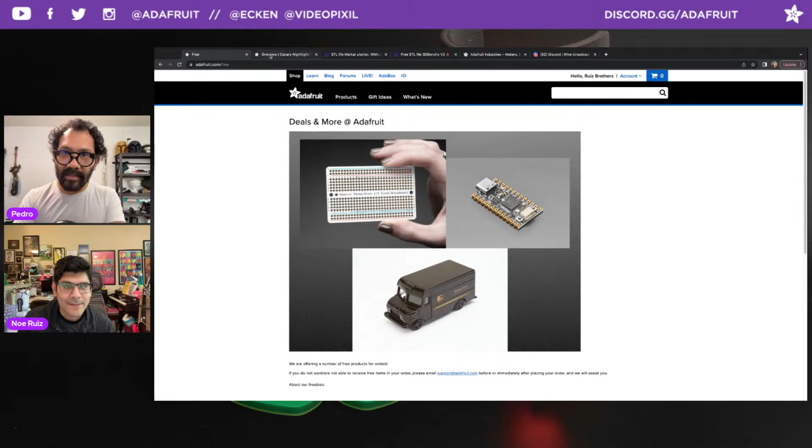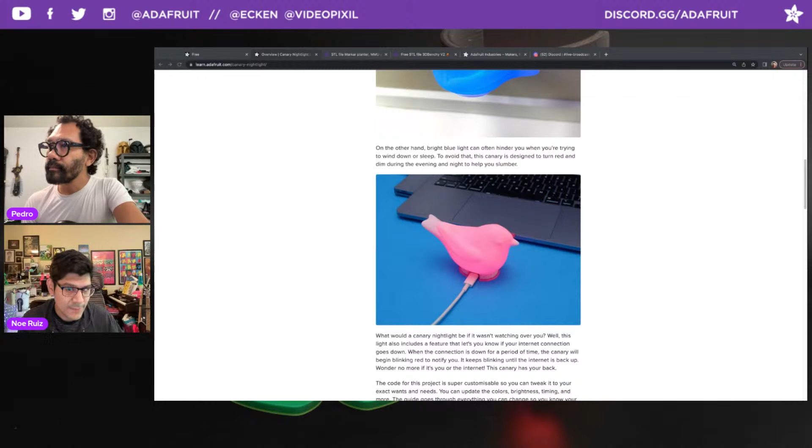Real quick, let me just run through the Learn Guide. This is a collaboration project with Kattni Rembor. She had this idea to make an IoT nightlight, and she was inspired by this song by the band They Might Be Giants. So she wanted to make a blue canary that watches over you, because that's part of the lyric. It uses Adafruit IO to get the time, and then depending on whether it's daytime or nighttime, it'll change the color. We've had a project like that before, the IoT star fragment lamp, but this one has an extra feature: it will blink red if it detects that your internet network is down. That was a feature request from Lady Ada herself. Check that out if you want to see some IoT CircuitPython code that will do internet detection, get the time, and control NeoPixels to be a certain different type of color.

This uses the ESP32-S3 QT Py board and the 5x5 NeoPixel grid. So if you're trying to do a little project similar to this bird, those are some good pieces of kit to make a little nightlight that's internet powered.

Of course, this could also be done in WipperSnapper if you just want to quickly change the color. But this is a CircuitPython project, and the Learn Guide covers the whole thing, the circuit diagram, a bunch of CAD files, and pages on how to set up your Adafruit account.

Kattni discovered that we had some older documentation on how to create an Adafruit IO account. Now everybody that has an Adafruit account also has an IO account, you just have one. So this has been updated for newcomers on how to set up your Adafruit account and access your Adafruit IO API key and everything you should know about. Good job, Kattni, she updated that.

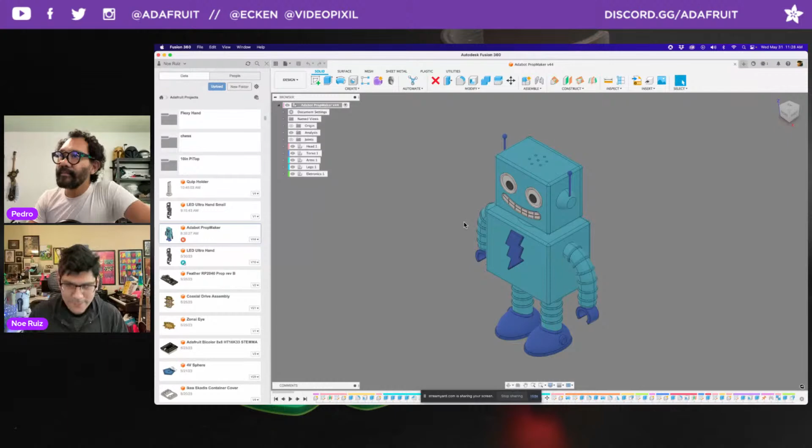All right, so I'm going to go into Fusion 360. We're going to take a look at some CAD. So this is Adabot. Adabot is getting an RP2040 prop maker feather. I have been spending a lot of time modeling up Adabot. We have a 3D printable Adabot kit, but it was designed back in 2013 using Maya, so it's like a polygon kind of model.

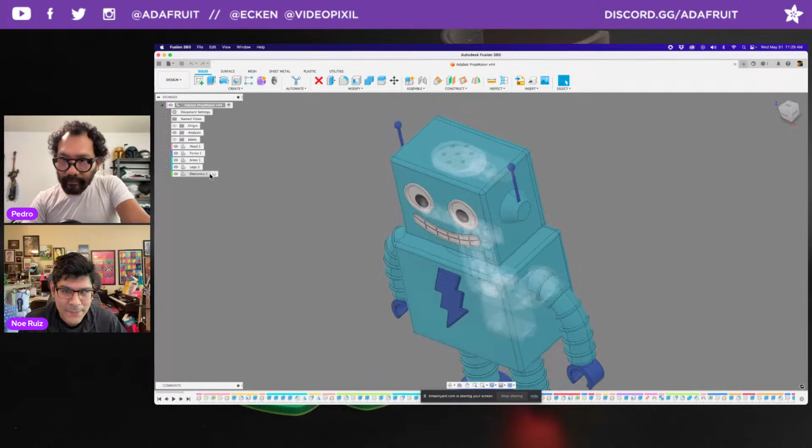This one is all done in Fusion 360. We'll have a step file available so folks can modify it in different CAD programs, but it's going to be a snap-fit-together Adabot with a prop maker. It's going to have lots of electronics: the prop maker feather, a micro servo, button, NeoPixel stick, and a speaker for audio effects. This is going to be a kind of animatronic toy. Adabot's head will be able to rotate, and Adabot's arms will be able to rotate. Legs will be 2 pieces so it can snap fit and be printed in different colors.

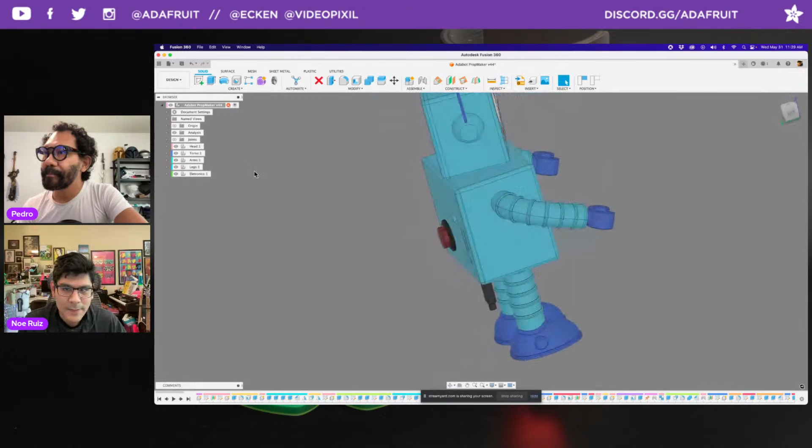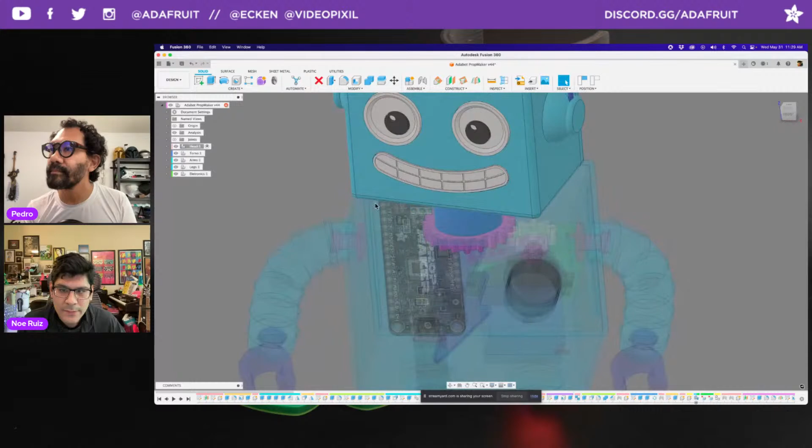The back here has a button to actuate sound effects. You have access to the Stemma QT port. You have some button pressers here for the reset and the boot button, and a USB port at the bottom. I had fun learning how to create these gears that use motion link so that they rotate in the proper manner. How cool.

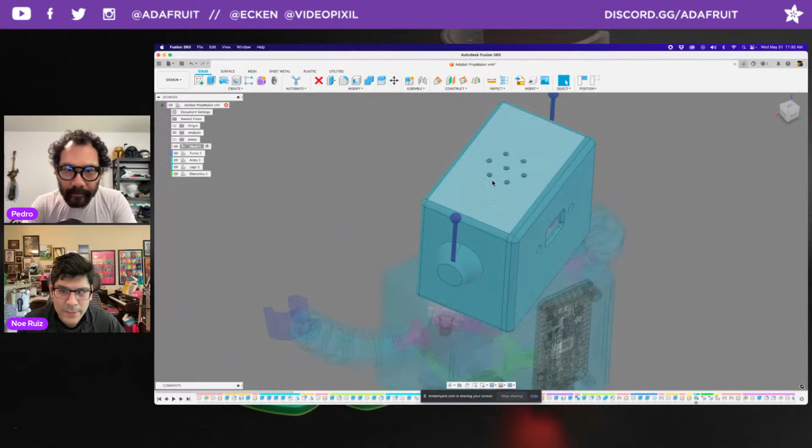Let me see if I can... Yeah, so you can see here that the neck is left open so all the electronics will fit in there. We'll have the speaker on top of Adabot's head, the mini oval speaker, and it'll all be done in CircuitPython code. You'll be able to rotate the claws. Ooh, I need to fix that linkage there, I merged the wrong thing, but you'll be able to rotate these claws.

But mainly the thing that was going to be servo driven is just the head, because I think it'd be too complicated to make the arms rotate. I think the arms could just articulate in this one rotation, and the legs are kind of static. But maybe we can design a different set of legs that have flexible joint hinges so it can sit down or sit on your shoulder. Maybe it'd be a fun little thing. But this is the start of it.

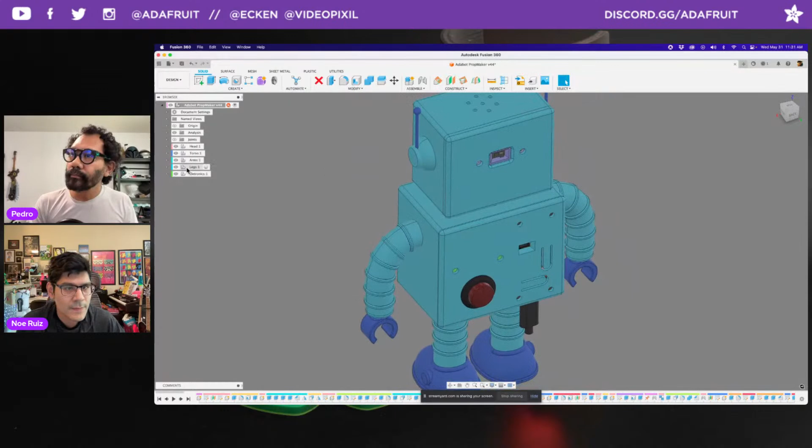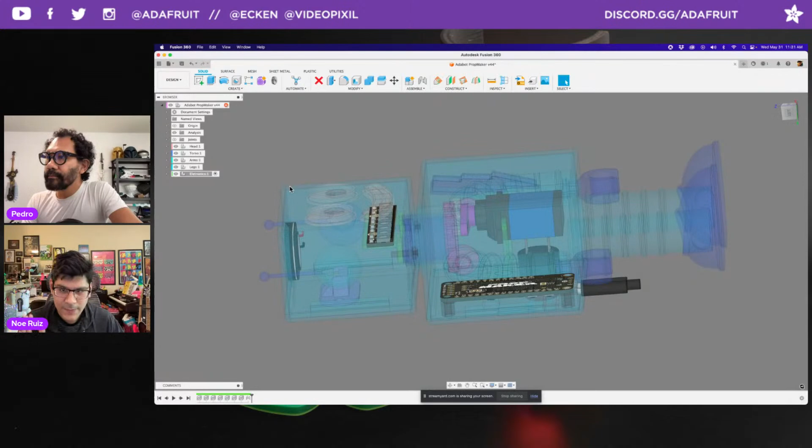It's basically using all of the accessories and features from the prop maker. I do want it to have the onboard accelerometer for sleep detection, so when you lay Adabot on its side, it'll stop the head from moving, and maybe it'll say an audible note like 'I'm sleeping' or 'good night.' That way you can shut it off

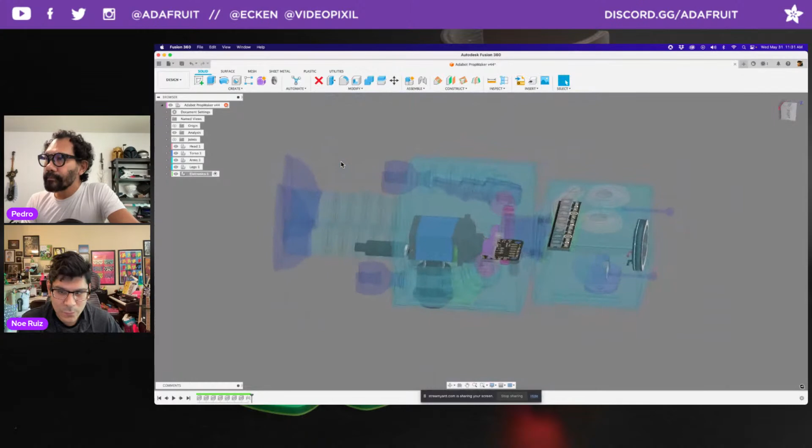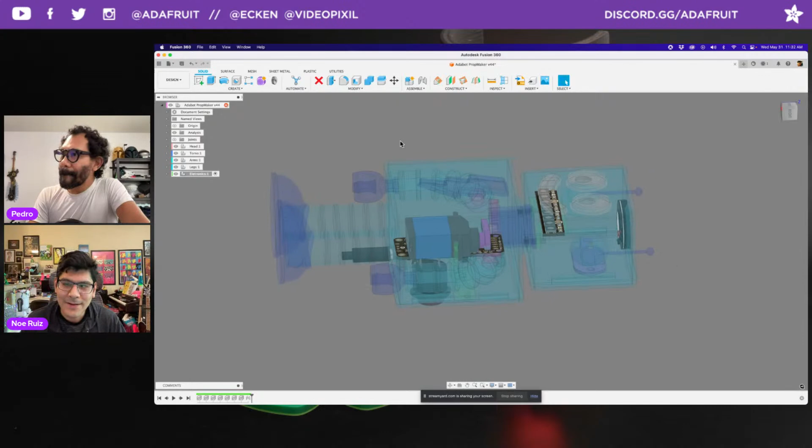when you're done playing with Adabot. So it's a fully featured Adabot. We haven't really done this before, and thankfully the prop maker will make all this possible with just one dev board, as opposed to like 5 different boards. Back in the day we'd use a trinket, then a lipo backpack, then the sound effects board, then the accelerometer - that's 4 boards - and the amplifier, that's 5. Power boost too if you wanted it rechargeable. So a lot of boards all come into one, and because of CircuitPython, all the audio files can just live on the board, with easy reprogramming and charging all with just one USB port.

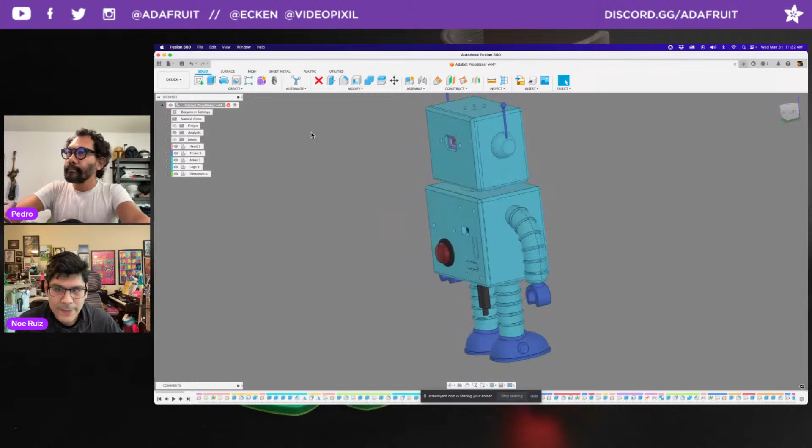So it'll hopefully be all support-free 3D printed parts that snap fit. I'm thinking maybe some magnets for the 2 arms so you can print it like this, and it'll clamp onto these little joints here. So yeah, I'm doing a lot of design considerations while making this.

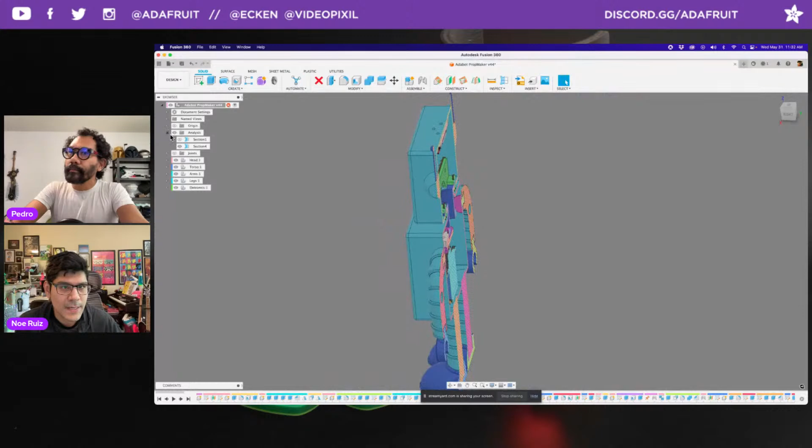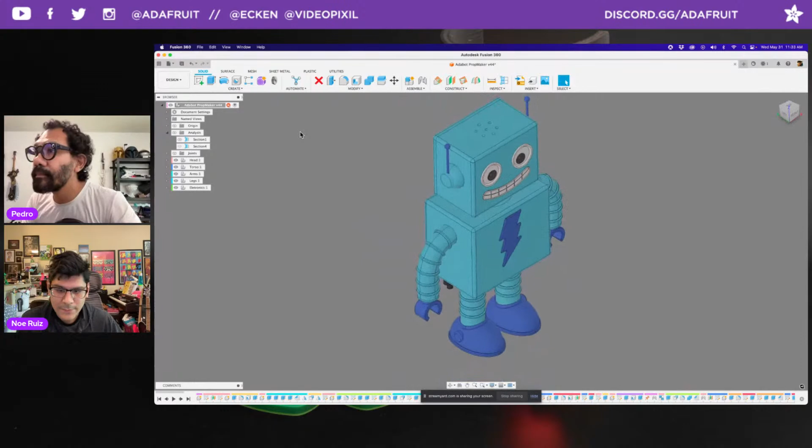Lots of CAD work, and this is the first time I'm using Motion Link, which lets you link different joints together. So as you saw, the head does that thing where the servo moves, and so does the gear. That is my prototype Adabot. I still have a little work to do, and then lots of printing to make sure all the tolerances work out.

But folks will soon be able to have their own excited animatronic Adabot. Dang, I just saw some of the teal color - remember we had a tough time finding the Adabot teal color. I should have ordered it, now I gotta look for it again. Yeah, it's fine, we can print it in any color. I've seen people print it in pink, green, black, all sorts of colors for Adabot.

So hopefully the prop maker feather will be released next week. Wait, it's all one, so it doesn't need a feather. Yeah, it's all in one - I think I missed that whole part where it's just one board, no headers to solder on. Holy crap, with all the right ports for servo and speaker, amplifiers built in, so no need for an amplifier. Dang, it's going to be a very nice prop.

Yeah, this is good since we have so many props. We're gonna have to redo all of them, like the Master Sword, the Guardian Sword, all the most popular props. We'll have to go back - the lightsabers, the dark sabers, all the sabers - they'll have to be remade. And Bender, we can make a Bender.

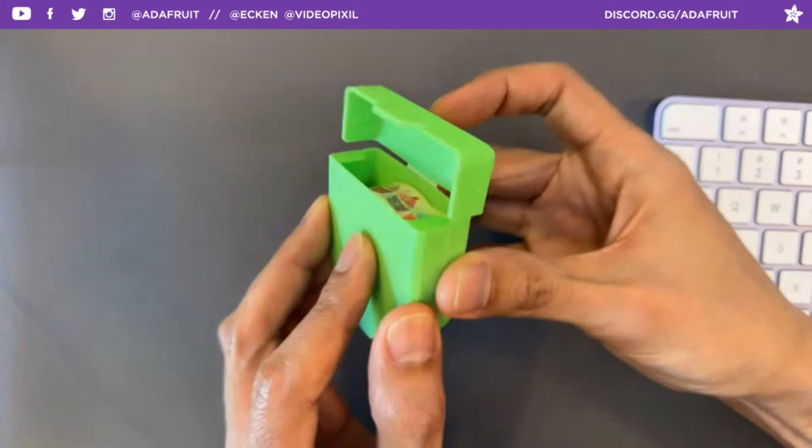And then you have some snaps in here, and this closes on both of them like that. There's your live hinge, there's another live hinge. You could probably put a key ring here if you wanted to have this on your keychain or something. It's just a little case that prints flat on the bed like this, all in one piece.

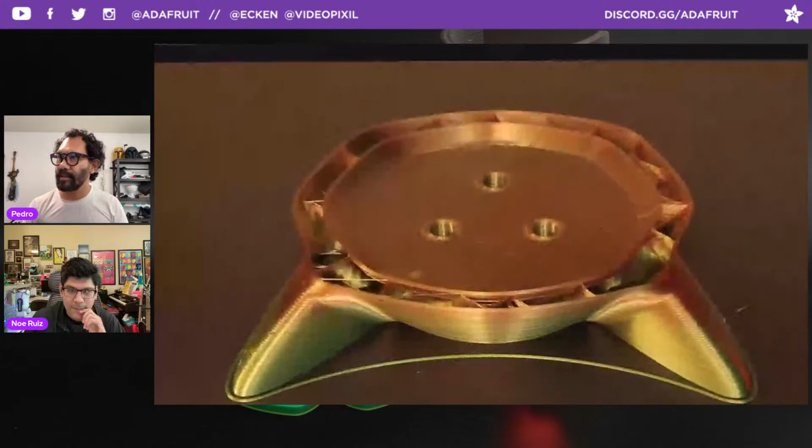Okay, well, it was awesome. We have a time-lapse video here. Oh yeah, there it goes. Here's what I was talking about. This is just the rainbow color one, just to show the time lapse. Yeah, that's cool, it's so big. Yeah, it's pretty big, it can fill up the bed plate there.

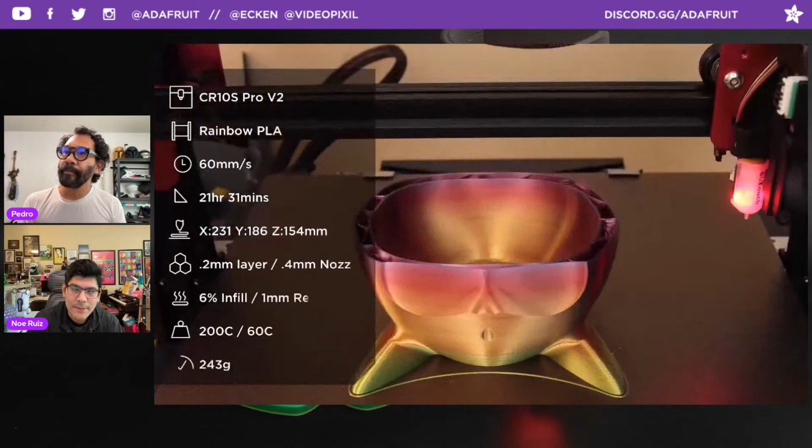Yeah, it takes quite a while, 21 hours. I think it's longer when you're doing dual extrusion because it has to park the head, do the purge, or do the retraction.

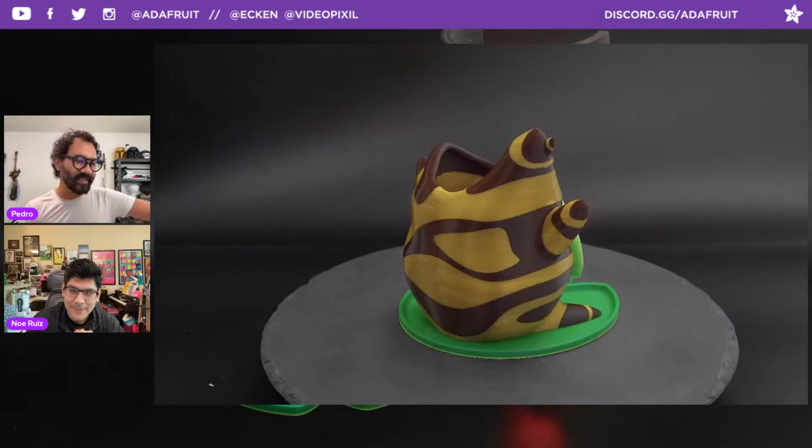This green is different too, it's like a more transparent green. Yeah, that's all I had left, I used it all up. Actually, on the lily pad you can see that it changes from a lighter green to a darker green. That's actually why I have all those spools coming in, because I have a couple of spools that just have a little bit left that I need to replenish.

So all the filament that I just ordered is like no-name stuff. Well, you just got to get what you can. Yeah, I tend to get my stuff from MatterHackers, they tend to stock good stuff too. So that's another option, but that's here in the States. If you got somebody else, a distributor where you're from, just check them out.

All right, that is the community makes.

Oh, I got a comment right here, also from David Michael, saying thanks, great work. We built the lightsabers from your article and we're excited to get this one too. Sweet, yeah, so I'm looking forward to folks building their own Adabots.

Cool, all right, next up we have a ton of community makes, so let's get through these in the next 10 minutes or so.

All right, first up we have one straight from Discord. Oh, this is an epic one. Very epic, you ready for this? Pedro, I'm watching. All right, this was posted on the Show and Tell channel of the Adafruit Discord. And Squid.jpg, who's watching right now, made 3 Darksabers.

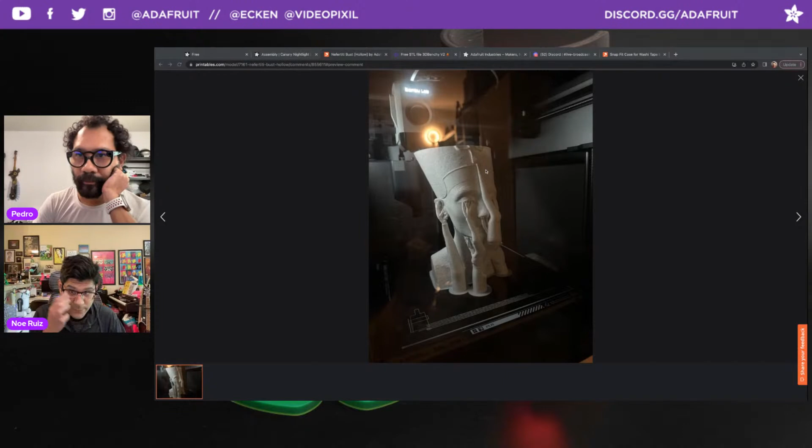So they're integrating the tree support as a design element in their part, which is fun to see. And then I think this is a Bambu, isn't it? Yeah, this is Bambu Lab. I think maybe the Bambu slicer has it. I was gonna say that's probably why everybody's doing it, since so many folks are sharing prints from their new Bambu printer. Cool, it took us a while to get on the Creality bandwagon, remember? Like for years.

And we're kind of exclusively on these. Not exclusively, but we use the Crealities quite a bit here.

I've been posting links in the private chat, not the other one, to post everywhere else. I'm getting this weird copy-paste issue where instead of a space, it's posting hex codes. If we're doing blog posts, it pastes in all of the hex code, so it's like %20 here, %20 there for all my spacing.

Is there an HTML option? Is there an option inside Google Docs to copy plain text instead? You have to take a look, I don't know. This is so annoying. Did Google change something, because this didn't used to happen?

I'm seeing on the StreamYard chat that you're posting on all the channels. That was just one - if you go to the private chat... oh I see, we've been posting every link there. Well, we're still learning, this is our first year using this software.